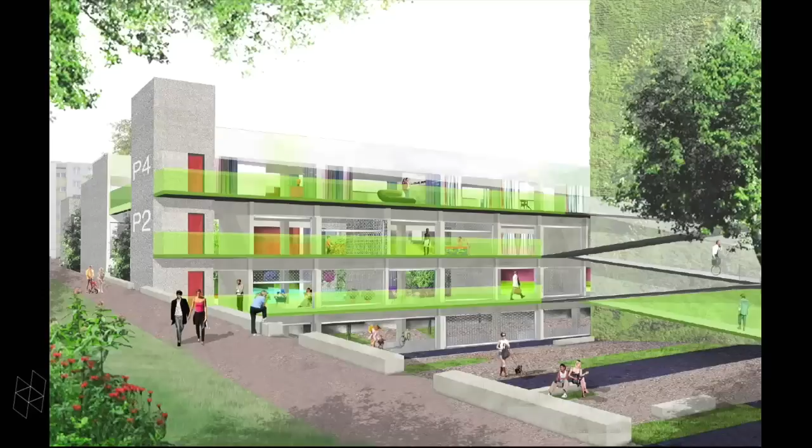So there is an interesting tendency that proposals that were developed for a more hedonistic context, like the transformation of multi-story car parks, are repurposed now as emergency shelters. You see a proposal by Augustin and Frank, a Berlin-based office, that proposed this two years ago as a form of urban dwelling for less affluent young families and singles. Now this model is repurposed as a model, of course reduced in terms of the quality of apartments and materials used, as a shelter for refugees. So these parking lots in Berlin, multi-story car parks, will be transformed to accommodate refugees.

I think it's important when we talk about the very large field of housing that one does not confuse the two crises of housing we're actually facing.

In one case, it's about mere survival. In the other, about what society we want to live in and what this society prioritizes and how it defines privacy and publicness in general, and what new spaces for this could look like.

But then again, I think these distinct problem areas have a lot in common, including the lack of ideas for fundamentally new, inexpensive dwellings that could conform to changed social conditions, or, and this is also important, encourage such change. And I think when we talk about housing and units, that the discourse on housing, at least in Europe, suffers largely from the imposition of the terms we use to describe the situation.

And I think it's also important for this discussion: in most European cities, families are not the majority of the population anymore. In Berlin and Munich inner city quarters—not the outskirts, but the inner city quarters—families are now almost a marginal group. Their share of all households is only between 15% and 20%, which is not reflected in housing policies.

We hardly know a setting that would accommodate a group of, say, 80-year-olds who don't want to move into a retirement home, nor any apartment type designed to house, say, two single mothers, their children, and a gay couple, though this is sometimes wished by people.

So the question of what a unit could be and how it could be produced is important already in this setting, but it's also pressing given that, according to a UNESCO analysis, in Africa, Asia, and India alone, 1 billion new apartments would be needed over the next 25 years to house migrants moving to urban agglomerations. 1 billion new apartments.

And of course, the question is how will these units look, as it's plainly clear that it's ecologically and economically impossible to build these apartments the way we do today.

So, of course, there were models, and I don't have much time, so I'm jumping through these. There were models that researched possibilities. This is the Nomad Home by Toyo Ito.

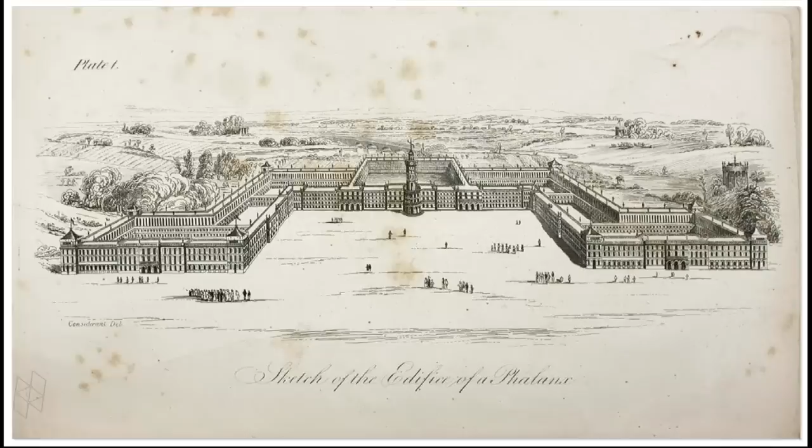In Germany, the O2 Village is a comparable effort to stack micro units and create social spaces in between. We could discuss this later—I'm jumping through the whole history of experimental housing, but we can come back to it.

So I would focus rather on countermodels: the joint building ventures, or Baugruppen, in Germany, which are interesting because, one, they point a way for bottom-up strategies to change urban districts, and importantly, they point the way to self-empower people, making them less dependent on state-funded projects or private developers.

So this is really a bottom-up movement where people say, let's put our money together, hire an architect, find some land, a lot in the city, and build a house the way we want to dwell.

These new collective housing forms do not exclude families, but they put a focus on other life designs and foster a new idea of social community life. This is R50 by Fezer, Heide, and von Beckerath.

They have in the basement here a two-story common room that can be used for meetings of the community. As you can see, each floor has a wraparound collective balcony that allows occupants to pass by all spaces, so clearly a focus on the communal.

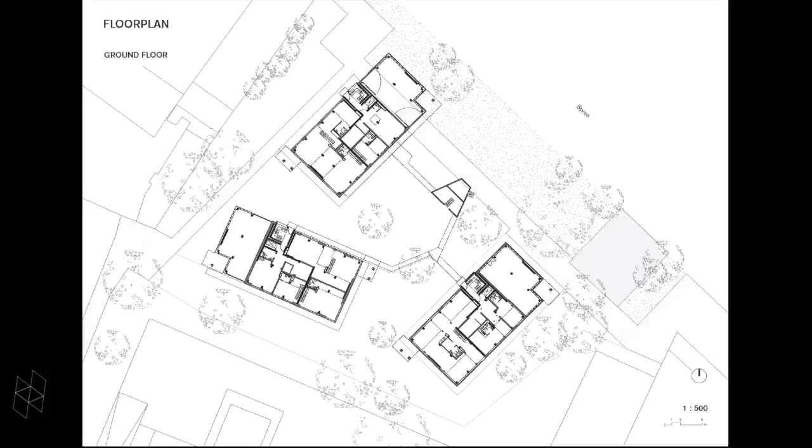They're quite open in their definition, but what's interesting here, unlike in some projects from the 70s, is that it works quite well because many people are actually working in these buildings and not only sleeping over. A person who owns a 540 square foot apartment here can use 1,600 square feet of common space, including a roof terrace and these ateliers.

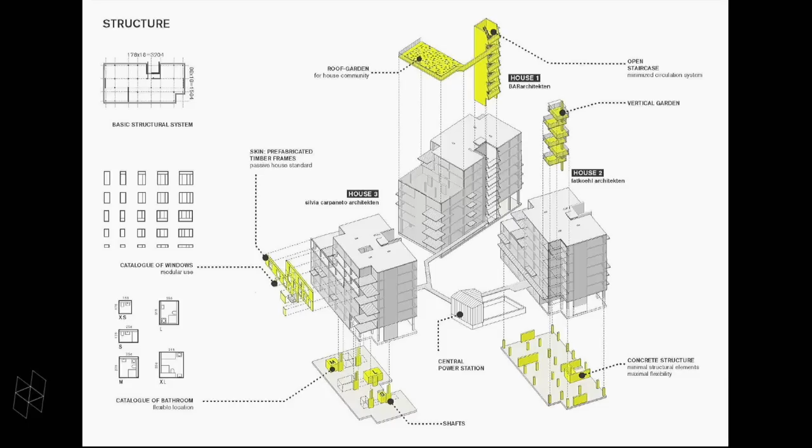So you can argue that here the key to affordable housing and an alternate form of housing is prefabrication. As you can see, these elements here are prefabricated timber frames, and also the externalization of many functions. In this case, a state-funded program for energy-saving construction also helped finance the whole project.

It has a clear focus on communal spaces. You can see it: this is the communal kitchen, this is a kind of communal living room, a communal terrace. This is also collective space, but at the same time everybody has a toilet and a little kitchenette, so it avoids that you are forced into a community all the time.

The architects were really influenced, and I can show some pictures here, by contemporary Japanese projects. This is On Design's office, Yokohama Apartments, maybe the only project that I would miss in this fantastic exhibition that you've mounted here, because it also relates to questions that you're raising with the exhibition.

It has a transitional hybrid space on the ground floor that can be separated from the streets only by curtains. So it's either a public roofed-over square with a kitchen in the center, or a more intimate living room with a kitchen when the curtains are mounted. Like the classic Engawa, the space allows both dissolution of the living room into public space or its protection from it. It's, I think, an important example of a strategy of radicalizing spatial atmospheres.

The kitchen becomes a cafe-like space of encounter for, say, a radically extended family, including the neighborhood, and the dwelling cells become even more intimate and cozy.

This is another example from Berlin for a new form of communal housing, Kurfürstenstraße by June 14, Sam Chermayeff and Johanna Meyer-Grohbrügge. It provides space for 23 housing units, but they're not units anymore, they're kind of different things.

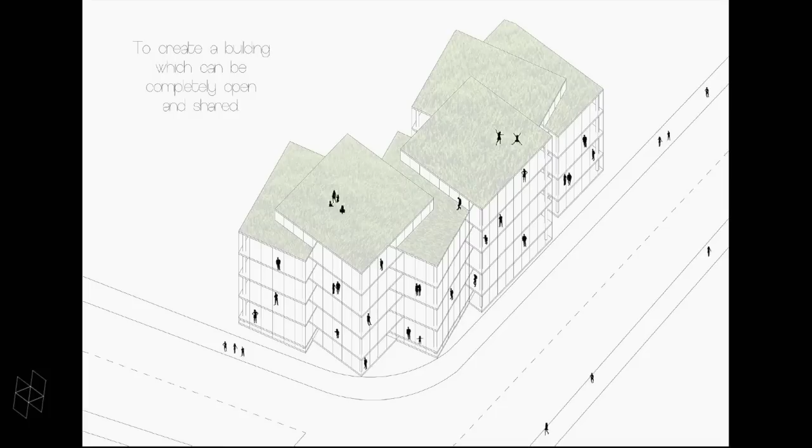They interlock across multiple levels, and the occupants have the option to either completely isolate themselves or to merge spaces such as kitchens and living rooms together, opening the way for extended post-familiar settings or circles of friends living together.

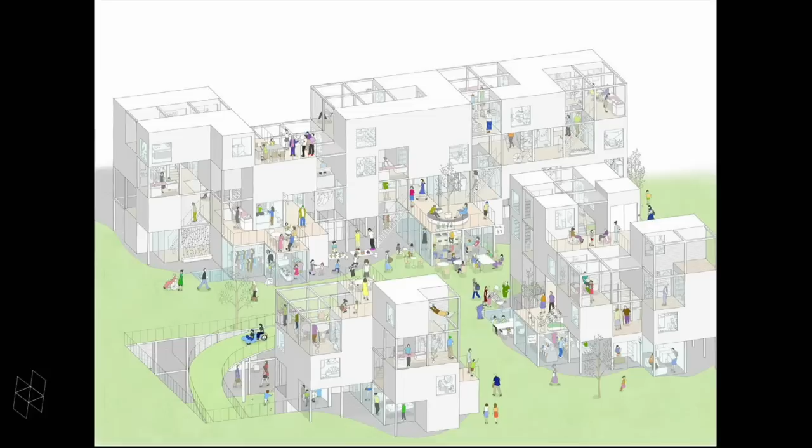This again has a counterpart in Japanese architecture, Riken Yamamoto's community area model, a similar approach where open structures can incorporate patchworks of workspaces, offices, daycare centers, restaurant-like community kitchens, and, importantly, studio apartments can be attached like modules when children or older people are added, or when several people want to form a commune.

Of course, I don't have to mention it, it's clearly a reference for all these projects: Moriyama House.

But as we don't have much time, I would come to an end of this quick presentation by addressing one question, which is the question of privacy. All these new forms of communal dwelling and public living rooms also raise questions concerning our idea of privacy, and these questions are addressed mainly in sociology and philosophy.

For example, the philosopher Raymond Geuss criticizes the modern conception of privacy that informs our idea of housing, where the individual self-evidently comes first as the autonomous starting point for theorizing and valuation, and community has in a way to find its role in promoting and defending the security and the well-being of the individual.

Geuss questions this view with reference to the ideal of a society that commits its members, to say it in a nutshell, beyond the right to retreat to a form of hospitality and generosity. This approach fundamentally challenges the view on housing of these philosophers. So the question here is, how does a house relate to the public realm?

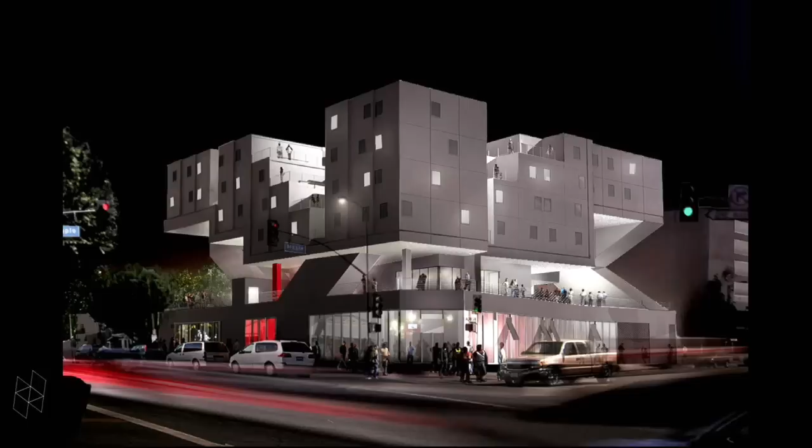I think this will be part of the architectural history of cynical urbanism. When we look for examples of a more inclusive way of building houses and of housing, of course you find that in the exhibition. It's Michael Maltzan's Star Apartments, where you do not create a distancing form, but rather a porous, permeable zone where public life can spill into the house.

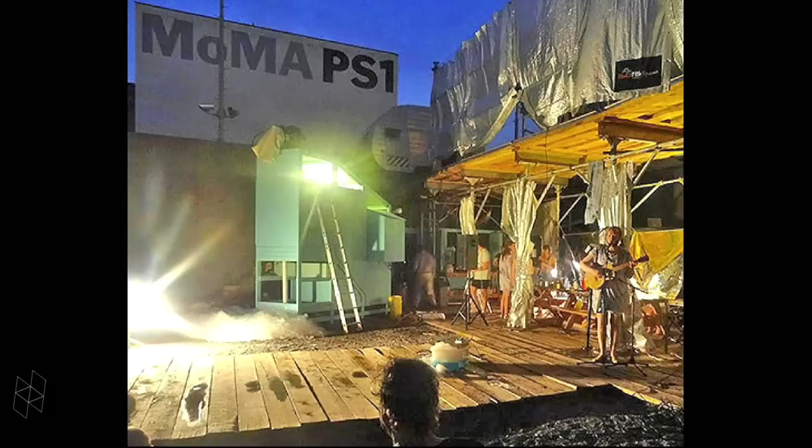Same was true for this project, the Colony, which was kind of an experimental model for how you could create a porous, permeable zone also under precarious circumstances, after Superstorm Sandy and other events. So maybe we can come back to this later. That was also part of the Colony, where you have this kind of permeable, inviting zone where the city can be part of the building, and where the nuclear cells, where you withdraw, are on the first level.

So I think I have my 10 minutes, I'm afraid. Thank you so much, and I'm happy to discuss it in detail later. Thanks.

Well, good evening to you all. I was asked to provide a little bit of historical background to this whole discussion. So chronologically, I'm going back to the beginning of the 20th century, or at least to the 20s. I thought I should make really three points that I want to get across. I do not address gender here; that's also an issue we should talk about in relation to housing, but I thought these ones were more urgent.

The first point is that housing really was at the core of the project of modernist architecture. The second point is that it really was a story of success, even though nowadays, or in the 70s, 80s, 90s, it used to be framed as failure—I think it's a success story rather. And thirdly, which is what's at stake in an event and exhibition like this one, there's a need to reclaim housing as a core concern for architecture. Let me start with that first.

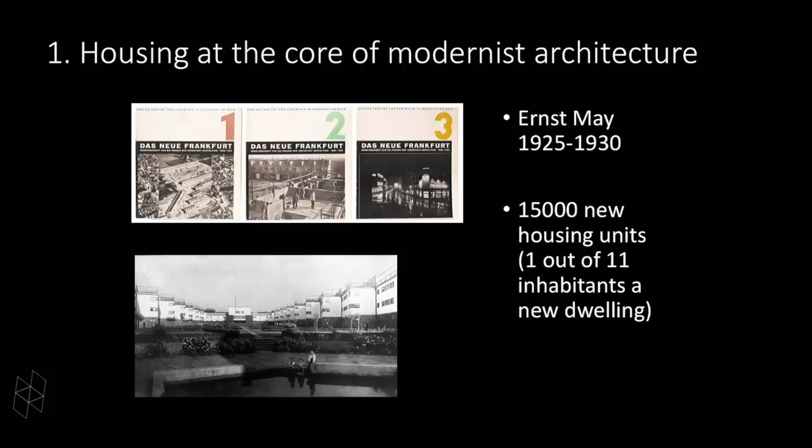So that really was an important accomplishment, and the main work was done in the field of housing, but housing was seen as part of a much larger endeavor. It was the idea to establish a new modern metropolitan culture that encompassed not just housing, but also sports and other kinds of visual arts, education, affordable housing. Das Neue Frankfurt, the journal, had issues about many different topics, the interior—it really was housing as a way to organize living.

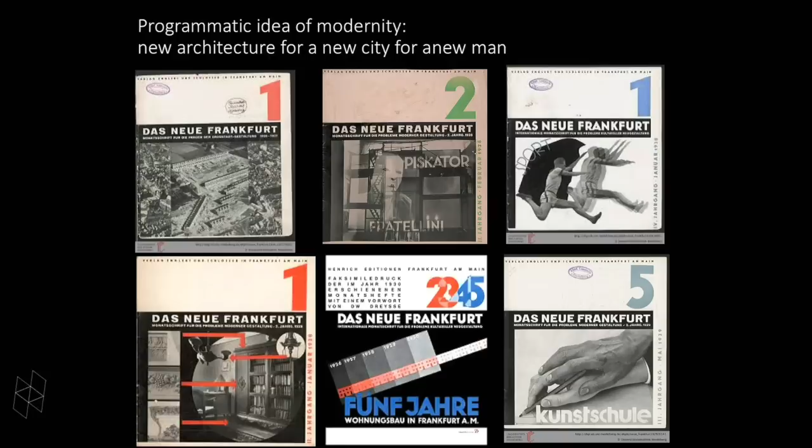And that's, I think, also how we want to talk about housing today. Of course, you can argue that some of the models presented then might not be so ideal anymore—we've come to criticize the assumption that the suburban neighborhood or estate would really be the answer to housing needs. But nevertheless, the Römerstadt estate that Ernst May and his team designed in Frankfurt remains a fantastic example, not just of housing, but of housing integrated with other amenities like schools and shops and so on.

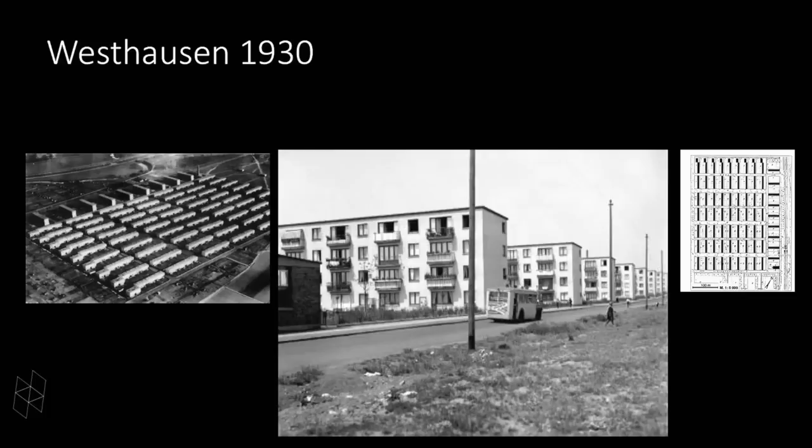But you saw also in Frankfurt that gradually there was a kind of loss of aesthetic sensitivity or aesthetic standards. Westhausen is much more efficient, much more according to existence minimum standards, much cheaper, much more affordable because of that. So that was really the neighborhood where the blue-collar workers could afford to live, not in Römerstadt. But already part of that whole rationalization campaign that boiled down to as much as possible for the least possible money.

But existence minimum was at the core of the investigations, of the research, really. I think what we hear nowadays about these micro-apartments is indeed taking on that issue again: how to organize living on a minimal space, how to make sure that people do have all the necessary amenities. And back then in the 20s, it was social housing with built-in kitchens, built-in bathrooms. That was amazing for the time that this was provided.

So it was an enormous step ahead in terms of living standards, but it was done by minimizing the amount of space. Ernst May really has an article where he says, what shall we do? If we have a certain budget, we choose to build as many units as possible for that particular budget, rather than provide people with larger houses but then accommodate fewer people. So it was a very, very rational choice that was made.

And the option was to go for the minimum amount of space, but very cleverly designed, like the Frankfurt kitchen by Grete Schütte-Lihotzky, which really provided everything in a very small space, very functional but very well designed. I think the micro-apartments of today will also be reminiscent of this type of existence minimum, where there was also research into furniture that could change a room from being a living room during the day to being a bedroom at night. That kind of thing was part of the whole experiment of Das Neue Frankfurt.

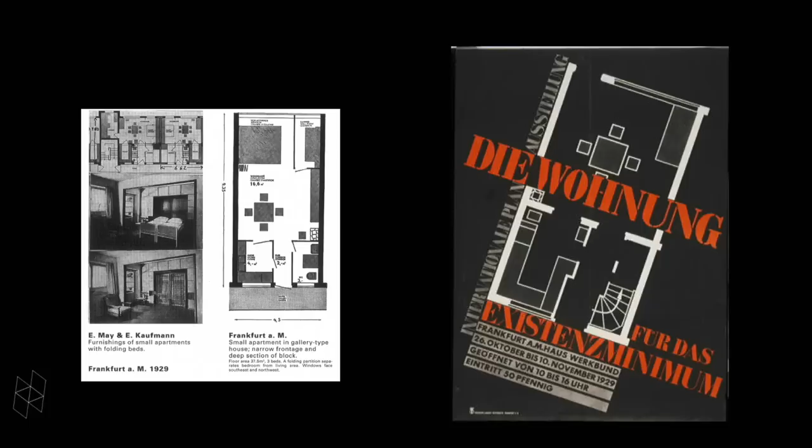And Das Neue Frankfurt also hosted the second CIAM conference in 1929, which was focused on the existence minimum. The dwelling for the existence minimum was housed there. And that's why I think also if you look at the themes of CIAM throughout its existence of 30-something years, CIAM...

Arguably the most important organization of the modern movement in architecture, CIAM was very much focusing on housing. The first content-related conference, CIAM 2 in Frankfurt, was about the minimum dwelling, but also the next one in Brussels was about rational lot development, really about how you organize that housing. The functional city was about zoning, and housing was one of the four functions that had to be zoned. Dwelling and recreation, again, about housing and how housing relates to other functions.

CIAM 6, 7, 8, maybe less about housing, but CIAM 9 again says habitat - we want to make a charter of habitat. So again, it became a very, very pregnant and urgent issue in 1953.

So for that reason, I say really housing was at the core of the modernist project. And I do also believe that in many ways it has been a success story. It's true that many of the projects were criticized and now are problematic zones in, for example, France, to a lesser extent maybe in the UK and elsewhere. It's true. But one should not forget the European welfare state, and to some extent also the American welfare state, in as far as that existed, did succeed in banning shantytowns.

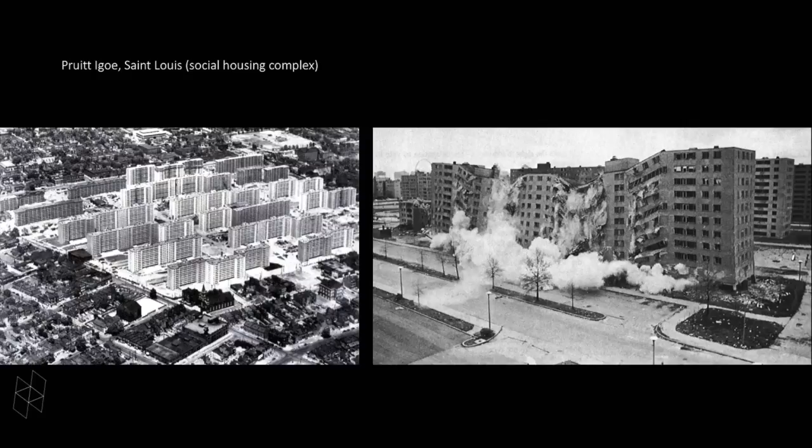We understand now that it was a huge mistake in terms of planning, that too many housing units were built for a housing demand that was really dwindling. And if you have a large estate with a lot of housing units and there is no demand, and not enough people willing to pay the rent for these dwellings, then you cannot maintain it. Then you have problems, and the ones that are still there tend to leave because the elevators break down, etc. So there was a whole process of decay going on that really had to do more with economics and management.

And cultural issues rather than with the design itself. So I really don't like to hear about the failure of the modernist project like it's so often framed. I'm not sure if this book is out there, but if it isn't, it should be.

Florian Urban has published this history of global mass housing, which contains a comparison of these modernist housing slabs and towers in Chicago, Paris, Berlin, Brasilia, Moscow, Shanghai, and Mumbai, arguing that the histories are very different in all these places, depending on local context, social issues, economic issues of affordability, and whether or not alternatives are available. So it's too easy to say it didn't work, we need to invent something else.

My last point is about reclaiming housing as a core concern of architecture. I think this is really what this event and this exhibition is also about. And I think we have been mistaken in architecture by letting that thing go, letting housing go, disowning the issue of housing, and letting it be

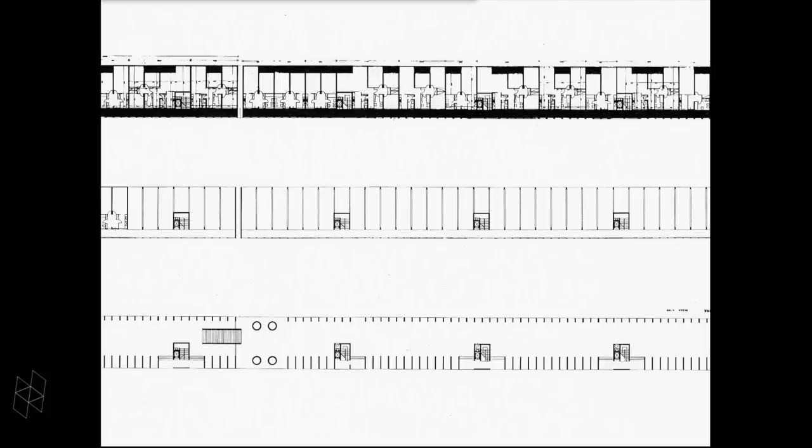But in the mid-1970s, even the most celebrated architects appeared to be out of their depth where it concerned housing. In spite of Aldo Rossi's interest in typologies, as seen in the Gallaratese project here, the apartments of the Gallaratese building seemed impoverished and regressive.

Those designed by James Stirling at Runcorn fared little better, and actually, poignantly, they were demolished 15 years after they were completed.

Now, the idealism and the desire to follow through the design of the actual dwellings, I believe, had gone. The interest shifted instead to the space around the home and the form of urban space.

Since then, the contribution by architects to the field of housing have been, in my view, negligible. The singular exception is in response to the growing individualism and the corresponding demand for diversity in the housing offer.

The most extreme example in this respect is the work of Jean Renaudie here on screen, and here you see the plan corresponding to that project. In it, no dwelling and no space in the dwelling is the same.

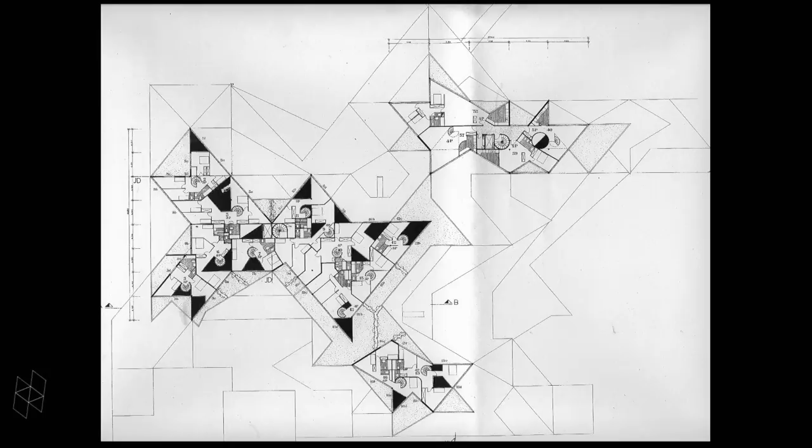Nevertheless, Renaudie upheld, and I think that is important, the principle set out by Le Corbusier, namely multiple orientation, duplex, spaciousness, and the provision of a garden or a terrace.

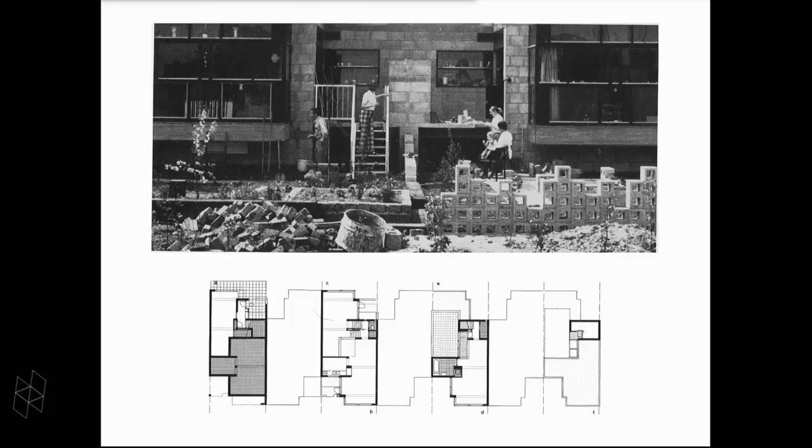Another figure also played a role, Herman Hertzberger, though he built little housing, had a contribution which was, I think, significant. He proposed, as you probably know, a generic form which he compared to a musical instrument, one that could be played upon by inhabitants.

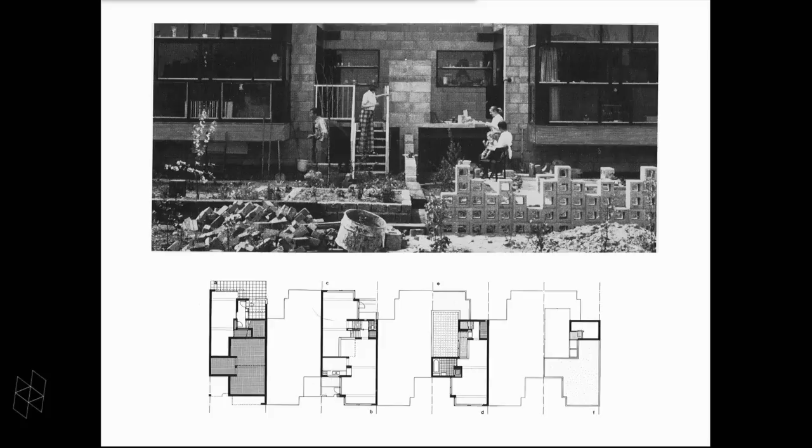Last, there was, of course, the advocacy of participation, always, I think, a marginal option, and that's something which might be worth bearing in mind, and for which Lucien Kroll was an eloquent spokesman.

Now, these three examples I have just mentioned, I think, represent three themes, you could say, respectively: difference, appropriation, and participation. They have been revisited 20 years later in the 1990s in Holland, but the context has changed.

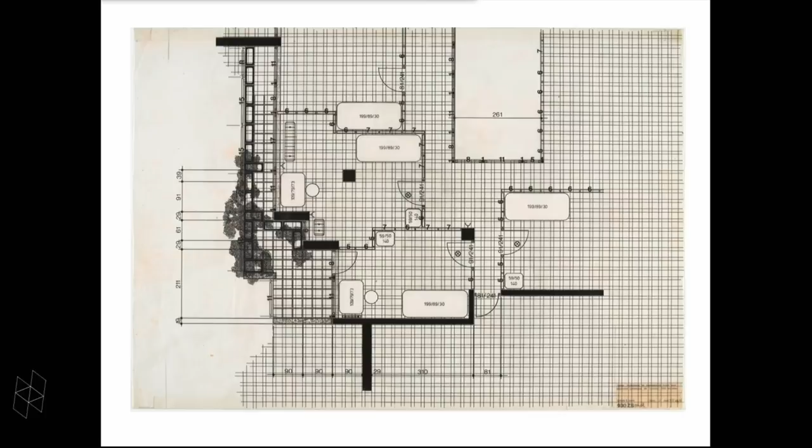Developers, now not the state, were the providers, and the social motivation too had changed. The drive for greater individuality, which in the 1970s had been a legacy from youth culture, became in the 1990s a spontaneous expression of the market.

At Borneo Sporenburg in Amsterdam, for instance, within a generic type developed by West 8, a family could, in theory, buy or rent a unique architect-designed house corresponding to their needs.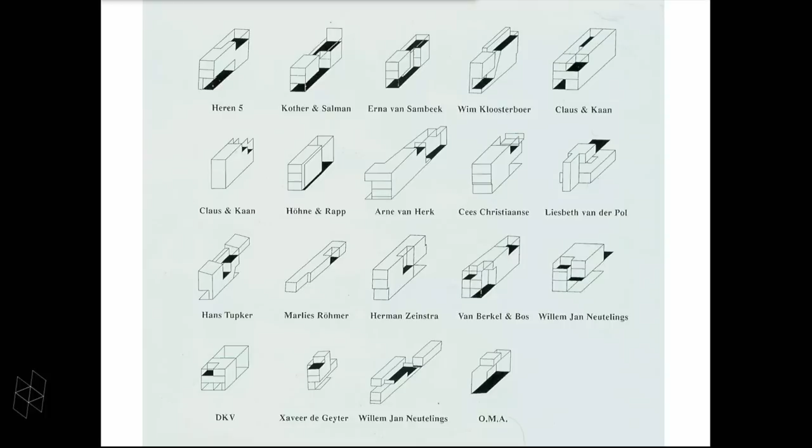And at Silodam by MVRDV, a theoretically infinite number of apartment types were offered to satisfy a theoretically infinite housing demand. Now, in a privatized housing industry, the offer necessarily precedes demand, and the design of dwellings is, I think, in a fundamental way, arbitrary.

But then, how could it be at all evaluated, you might ask? In hindsight, it is hard to escape the sense, especially when compared with the best achievements of modernism, that this design lacked substance and commitment.

Too much difference, I think, was spread too thinly, and a comparison between the so-called unité type at Silodam with the real Unité in Marseille and elsewhere would, I think, be enough to make the point.

Now, the recession in Holland, then the crisis of 2008, derailed this train of thought. The issue became how to reconnect the design of housing with residents, or in the language of the 1970s, with the users. And what one, I think, is witnessing at the moment, in Europe at least, is a resocialization and a repoliticization of housing. Here I'm talking about, of course, what is happening in the architecture world.

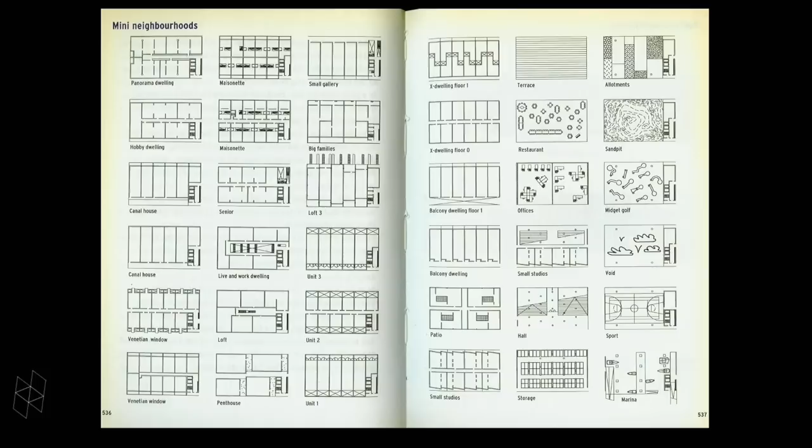Now, for the sake of this discussion, three trends can be identified today. The first concerns the rehabilitation of the modern housing stock. As such, it is literally an extension and a deepening of modernism.

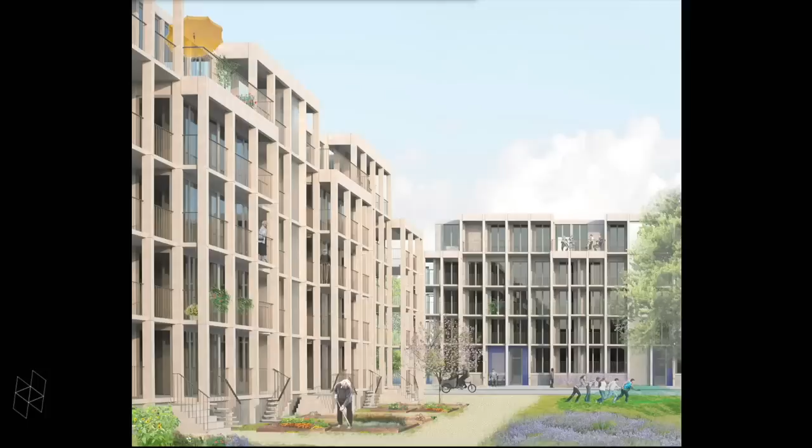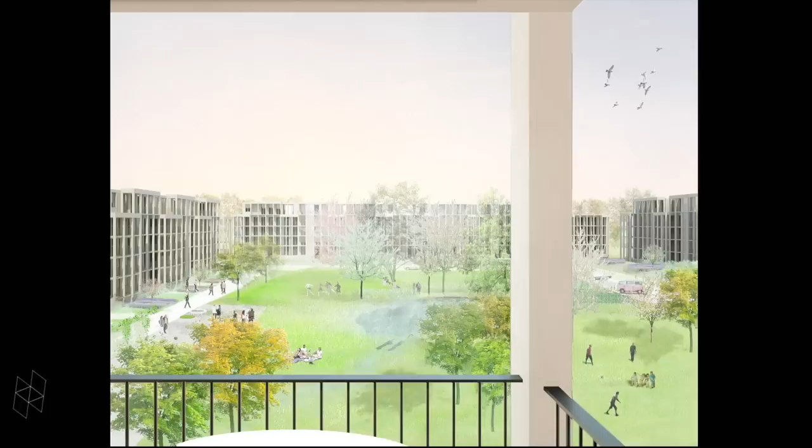Now, the approach is socially and spatially sensitive, and the details, which are partly inspired by the architecture of Peter Märkli, I think are unusually fine, certainly for this kind of commission.

The second trend, which is actually shown in the exhibition, is more radical in its politics, and it draws from the cooperative movement, which is currently enjoying a revival in Europe. This project entails a renewal of terrace houses in Toxteth, an impoverished district of Liverpool. And here is the proposal, also in the exhibition.

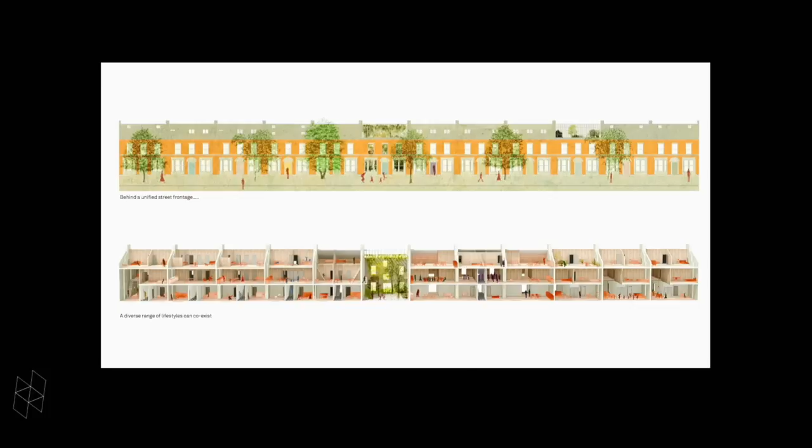Now, in this, the project, I think, recalls the squatter movement of the 1970s, but in the upholding of radical principles and in the insistence on the purity of the process, the approach of the architects recalls, I think, the Occupy movement. And unusually, in projects of this kind, the care in the design and in the craft of building is very high—something which I think is very unusual and very promising.

This project, incidentally, is underway. I mean, indeed, these last two projects are underway.

The third trend places less demands on consultation and participation, and it may have, for this reason, a wider influence, I think, in the long term. It aims to establish a universal type, or at least types that would have a wide appeal.

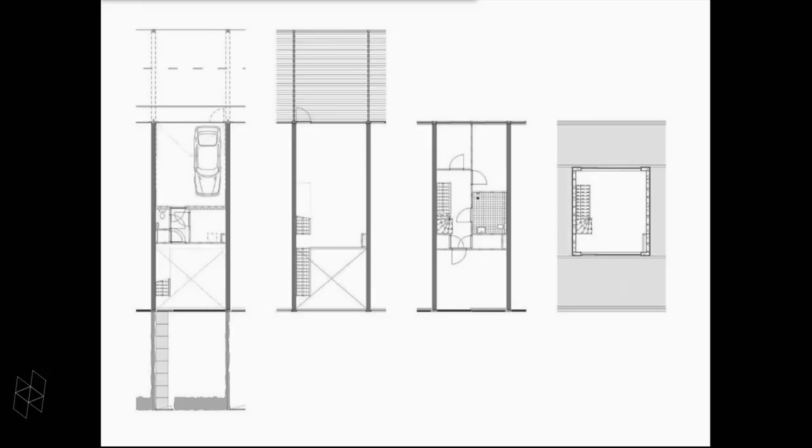In Amsterdam West, the office called Atelier Kempe Thill designed a terrace of identical dwellings in which individuality is deliberately limited in order to achieve higher standards in design and construction. Inscribed in a long tradition of rationalism, the approach draws equally from the classical tradition and from modernism, leading to what the architects call classicism for the IKEA generation.

And here is one. Oops, there has been a mixed up here of the slides. Can I move this? Let me see if I can. Well, no, two have gone missing, I'm afraid. You'll have to trust me that I'm telling the truth. So to this...

Okay, all three trends which I have shown, I think, bear the marks of modernism. And I cannot help feeling that the issue today, for architects building housing, is less what makes people different than what people have in common and what they actually decide to share. For instance, the so-called garden room in Copenhagen, the collaborative work in Liverpool, and the IKEA classicism in Amsterdam West.

And so to this extent, at least, in emphasizing what is common rather than what is different, housing after modernism will, in my view, be modern again. And of course, it goes without saying that housing doesn't have to be modern, and in most cases, I believe that it will not be. But in respect to housing design, modernism, I think, is our beginning.

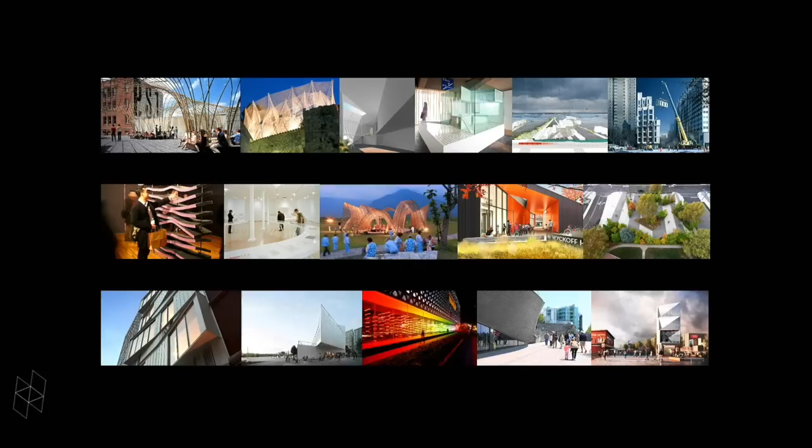Certainly a little less so in the United States, perhaps, than in other countries—in New York especially. So in our work, we situate our own housing production within several larger questions, which are opportunities to instigate or adapt to changes. We've been interested in how architecture can adapt to climatic or demographic changes, and in creating different scales of interaction between different publics, or rethinking who the public is—not a general idea of public. Finally, it's an opportunity to affect a macro scale with a minimum of means—in this case, minimum micro units, minimum spatial means.

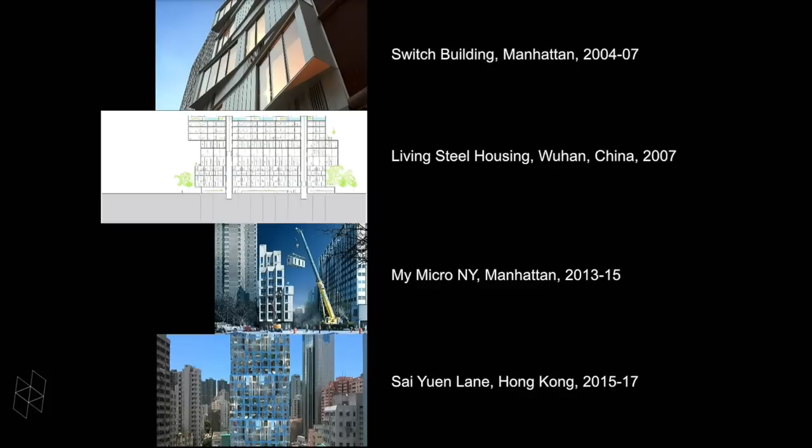We've only worked on four housing projects so far. We're now working on a 250-unit tower in Hong Kong, but it's still an important part of our practice. The ones in Hong Kong, by the way, are smaller than the ones in New York—they don't call them micro-units, they just call them apartments. An article in the South China Morning Post last spring referred to our micro-unit project as 'Hong Kong-style apartments arrive in New York.' So the irony that we're now working in Hong Kong is not lost on us.

In 2012, we were invited by the developer Monadnock Development to join them in a competition for Mayor Bloomberg's Adapt NYC competition to design the first new micro-unit prototype in New York City. It had to be a developer-architect team, so we can talk about agency afterwards—we can't do these things alone, can't even enter these competitions alone.

My partner Mimi and I were a little horrified at first, to be quite frank with you. We've sort of drunk the Kool-Aid now that we understand the larger context of micro-housing, but we were a bit horrified about designing apartments that range from 250 to 350 square feet. I'll explain later why we're now less horrified.

In the beginning of the 20th century, Jacob Riis focused his camera on the urban poor, shocking and galvanizing a nation to revisit laws that would provide proper sewage and ventilation to a city of over 3 million. The housing reforms that followed over the next decade encouraged a set of new legal standards for light, air, health, and safety.

Meanwhile, after the Second World War, the average size of a home practically doubled, from about 1,000 square feet in the 1940s to its apex in 2007, just before the crash, at about 2,700 square feet—kind of like large cars from the '70s. They now seem a bit like relics of a time gone by.

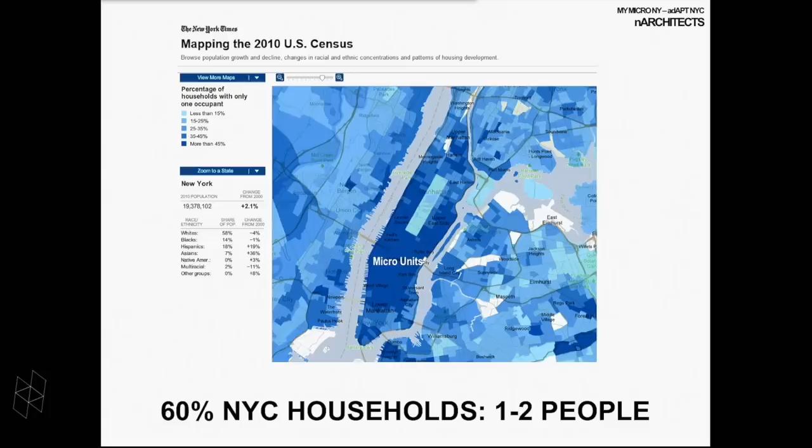In Manhattan, 46% of inhabitants are single, and the 1 to 2 person household is a very large proportion, shown here in dark blue. Compared to Boston, for instance, at 38%, 33%, and so on, it's a trend across the United States and the world, even more so in European capitals and in Tokyo. This has increased substantially in the last couple of decades, a 30% increase in the last decade alone.

So what are the options for people in, say, New York City, where there's a large number of illegal apartments that are in fact micro-units by another name, where one might have no view, an insecure situation, or very little space? The other option is to move out, putting extra burden on transportation infrastructure and contributing to sprawl.

The Bloomberg administration, in conjunction with the Citizens Housing Planning Council in New York, initiated a study and exhibition called Making Room, creating a body of research that was used as a reference for competitors in the competition we subsequently entered.

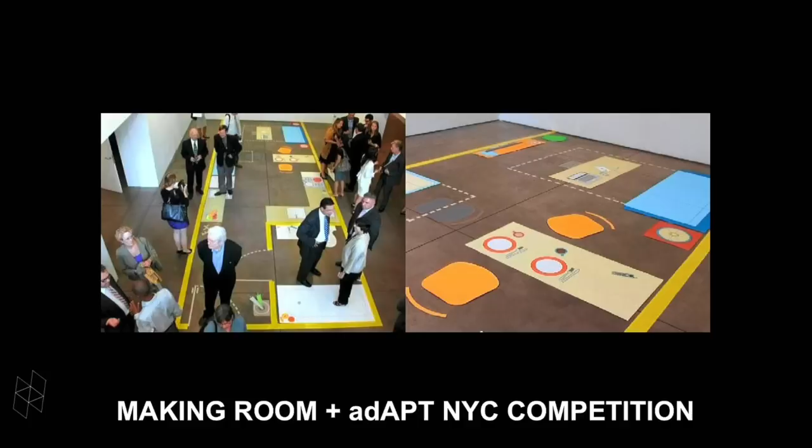That competition challenged developer-architect teams to come up with a micro-unit type on a very small lot owned by HPD, Housing Preservation and Development, right next to a NYCHA site. We won this competition by basically following the brief and doing something very straightforward.

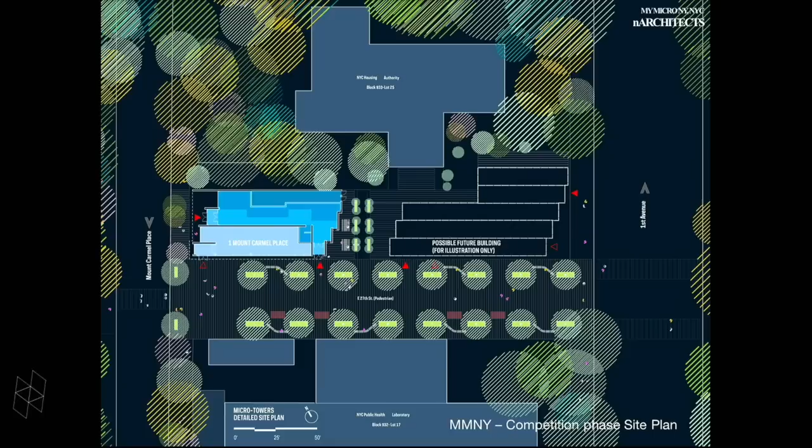The site is on 27th Street in Manhattan, at First Avenue, on a kind of dead-end, small pedestrian street. This is our project.

Our big challenge was to design a building that was somehow generic, a replicable prototype that wouldn't be a standalone building per se, but would insert itself within the legacy of housing in New York—which is why we chose brick, just as an example. At the same time, it would express something about micro-living in terms of its dimensions, without expressing the individual.

Unlike Moshe Safdie's Habitat or other subsequent projects that tried to equate the idea of the physical unit with the social unit, we were very interested in thinking about how people who live in small apartments need to be nested into different sets of social scales.

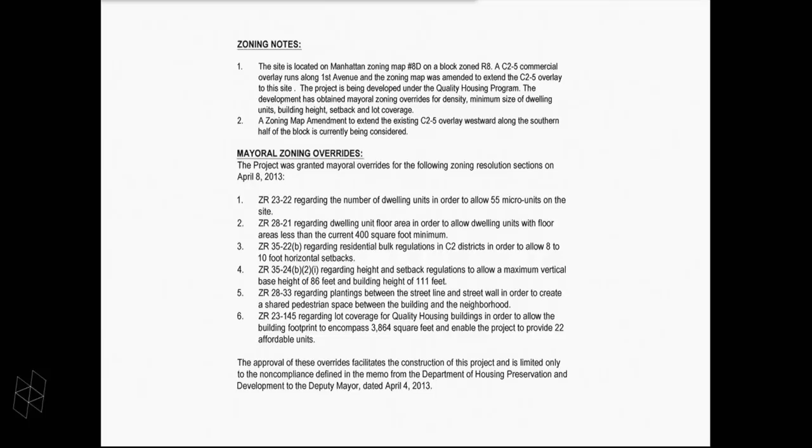For this project to occur, we were granted several mayoral overrides, the most important of which were to lift the maximum number of dwelling units—called density in the zoning code—and to lift the minimum area, which in our current code is 400 square feet. The rest were minor ones specific to our project.

We thought of the resident as living in a variety of nested scales, and an important one is the amount of social space we were able to contribute in the project—not very much, but substantial for this type of building in New York.

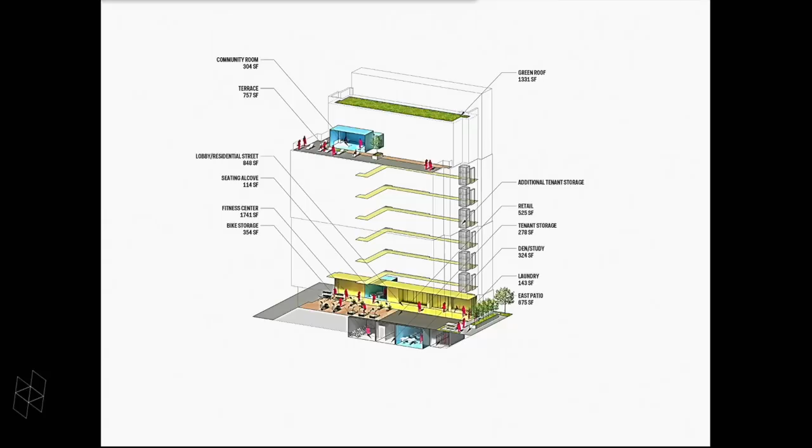Here you see them distributed. It's a very small building, comprised of 55 units, 9 stories tall, built with modular construction. Normally developers won't even let you do these things, but we were able to provide quite a few amenity spaces, though we wish there were more.

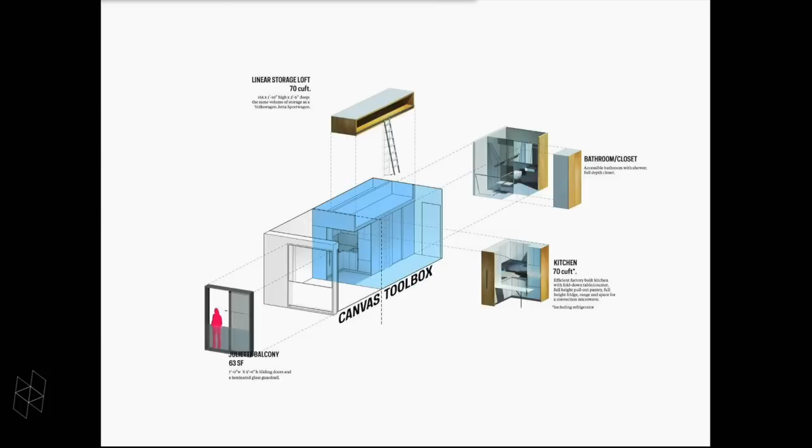One other thing we thought was quite important, since people are living in very small units, was to connect them clearly to their context by providing very large windows and great ceiling heights. The typical unit, about 300 square feet on average, has a 9'8" ceiling allowing for overhead storage, and tall sliding glass doors which reveal a Juliet balcony.

We have about 5 to 6 basic types—7 are shown here, but they're basically similar. This is the most dominant one, quite straightforward. It's very difficult on such a small lot to come up with many different orientations and configurations that meet the code.

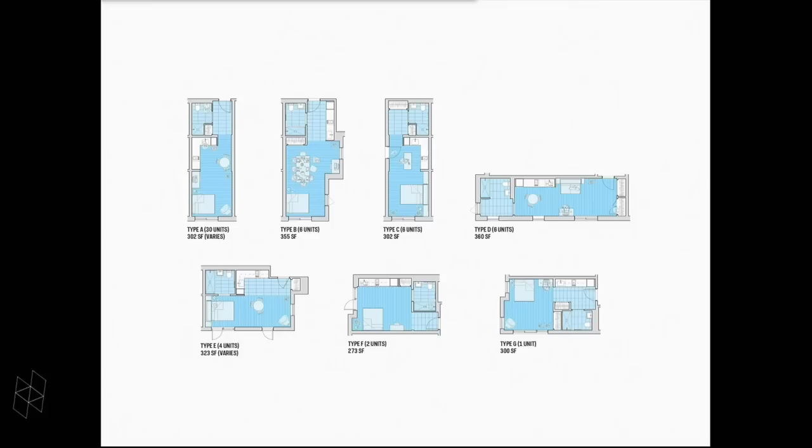One thing about our code in the United States that differs from other countries is that the interior of the apartments has to be fully accessible to wheelchairs—the one we're designing in Hong Kong does not have this requirement. Right at the threshold between the corridor and the unit, you can dispense with that and have kitchens with only 600 millimeters between the counter and the fridge. What results is a disproportionately large bathroom and kitchen for the size of the apartment, but we've tried to make it efficient.

This is the current plan of a typical floor, where you see basically four similar apartments facing south, and then the grain shifts to the west. We have a kind of efficient core.

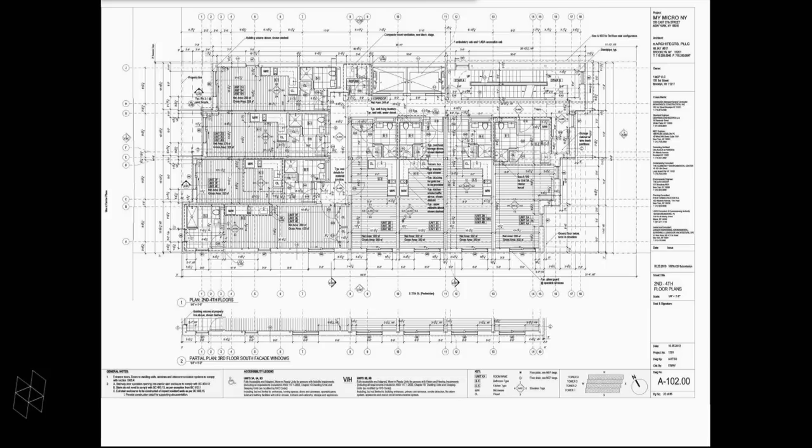At the end of every corridor we have a shared storage, a vestige of a grander idea we had, which was to have a social space at every end of the corridor, but this was eroded bit by bit, not so much by the developers as by the very tight site and the redundancies of modular construction, which requires a certain thickness of walls.

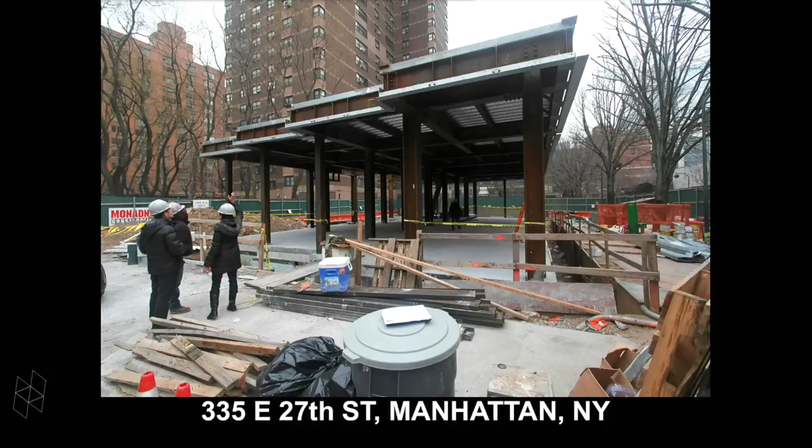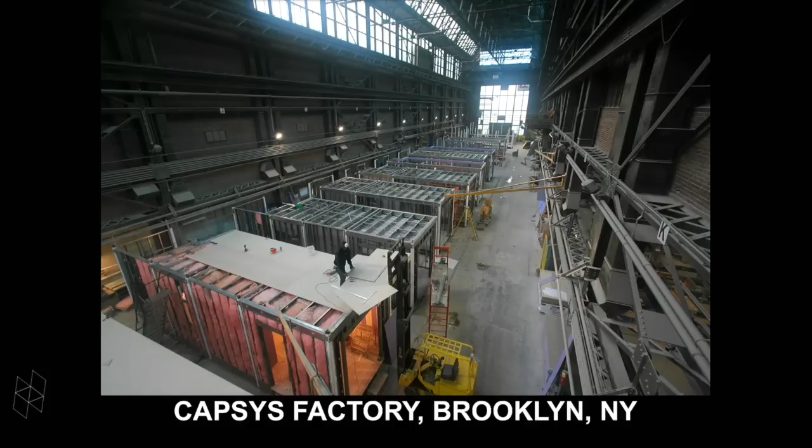Just to describe quickly how we built it, which was kind of interesting: we used traditional construction for the basement and the first floor, and modules produced in the factory in the Brooklyn Navy Yard for everything else, including the core. It's about as high as one can go with this system.

I think about 135 feet before one needs to have a braced core, as I understand it. The modules are comprised of steel pipes and a chassis like a car, and a redundant floor-ceiling assembly, so they're weather tight and they stack on each other.

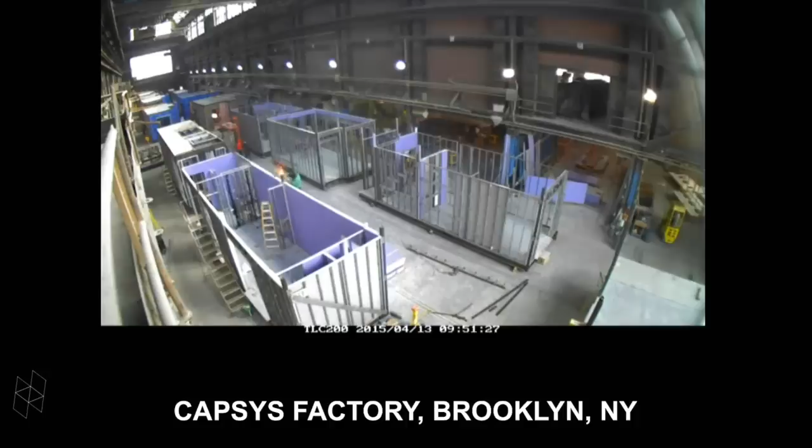So this is a typical day in the factory. It's a short video, maybe 2 minutes, I'm not sure I'll show it all. It shows you how the modules advance along the assembly line, just like a sort of Model T Ford, with different trades, all unionized, doing the same thing over and over again really efficiently, which in principle should really speed up construction and give it a much higher level of finish.

One thing we were able to achieve is a high level of tolerance, which was very important in this project. We were building to 3 millimeters, which is 1/8 of an inch, beyond which we would not comply with code. We were on such a small site that if the apartment width were even slightly smaller, it would not comply. So this would have been very difficult with traditional construction.

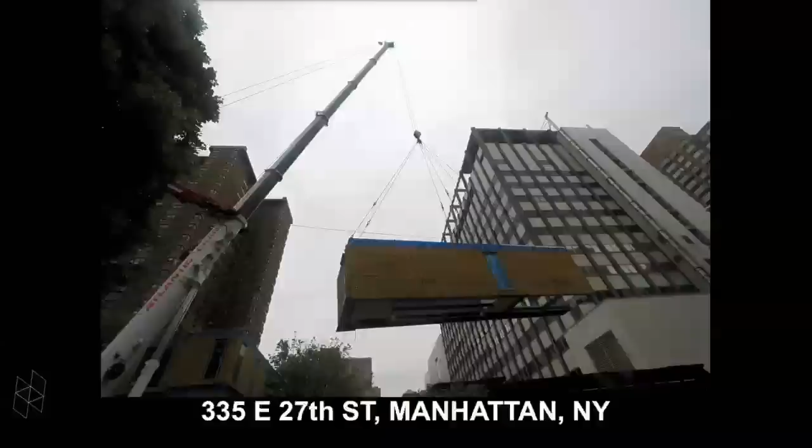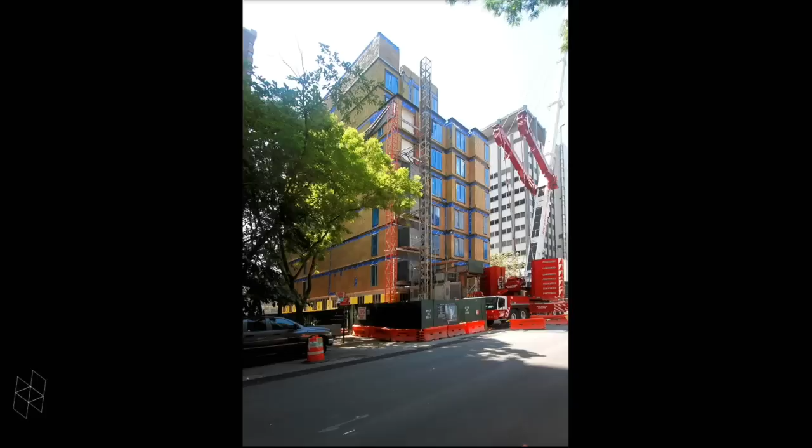So this building is actually taking a long time, paradoxically. But what was very fast was the stacking, which happened in 3 weeks and was kind of breathtaking. One nice thing was that it had a very low impact on the neighborhood because of very quiet construction—you just hear welding as these things go into place.

Of course, now we're back to sort of traditional construction as we skin this with brick. We decided to do that for many reasons, one of which was just to make sure we have a good envelope, seal, and so on. Just quickly...

I forgot to put two slides here, but I wanted to make four points about thinking about units. Niklas broached this topic—the housing studio I'm teaching this semester deals precisely with this issue, that we're prisoners of language in that sense, inheriting a lot of preconceptions about housing, which is a type with probably the largest baggage, shall we say—which is also a great thing. So what we're trying to do in the studio is consider what a unitless house or unitless housing would be, reconsidering the idea of units within four frameworks.

The first is the social unit. For whom are we designing, if in fact 37% of Bronx residents are single mothers with a child, just to give an example? Co-housing is introducing new types. Even though we talk about it, we don't really design for anything outside of a nuclear family. Most of the types we see in the exhibition still adhere to that, with a few exceptions—and perhaps that's just the opportunities we have.